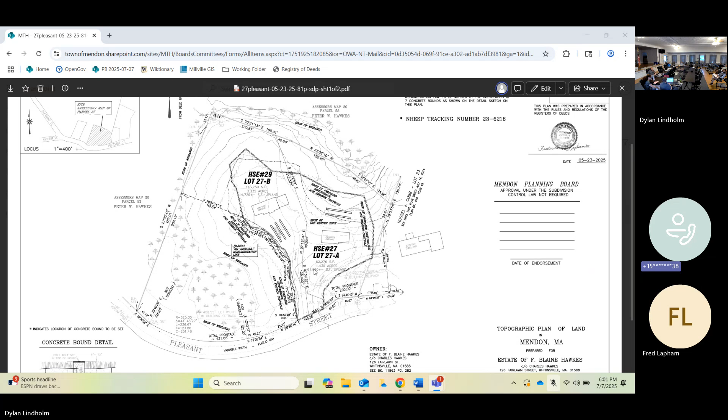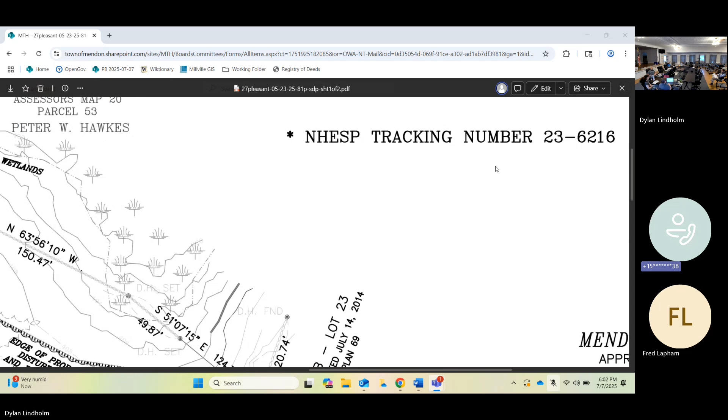Fred's online. Fred, if you want to explain the plan. Yes, certainly. This is a little different plan. The planning board has approved a plan showing 2 lots in this location on Pleasant Street. What we're looking at here is a compliance plan for the wildlife habitat permit we got for the site. They wanted us to put a plan on record, so we used the original ANR plan and overlaid our work area and the monumentation they're going to require. They're going to require 7 bounds, concrete bounds, to be set on the property. We're not subdividing land. I have a plan purpose note at the top of the plan on the right, and it is for the sole purpose of compliance with the habitat permit.

So we don't have to approve it, right? It's not approved under the subdivision control law, but in order to get it recorded, it has to be signed by the planning board. Otherwise I wouldn't be able to. So we need a vote to endorse the plan.

I'll make the motion to endorse the ANR for 27 and 29 Pleasant Street. Second. All those in favor? Aye, aye, aye. Unanimous. There's a copy here for us to sign, Fred?

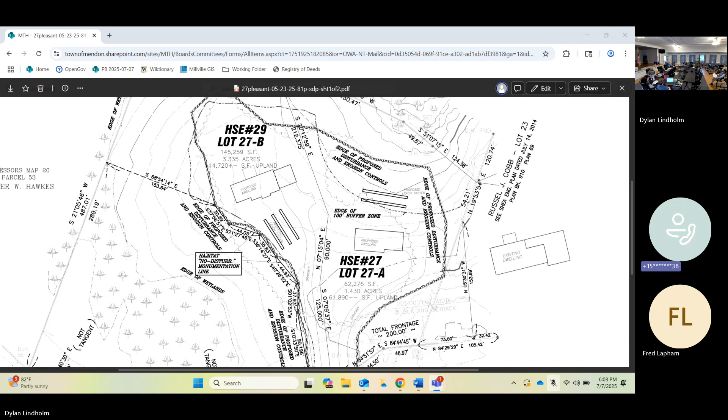Sign that. Wait, yes, I have copies up. There should be 4 prints. Got it. Why don't we sign them? We'll wait for them. They'll be in our office after today, so you can pick them up tomorrow or Wednesday. I can pick the original up tomorrow at the office. Is that okay?

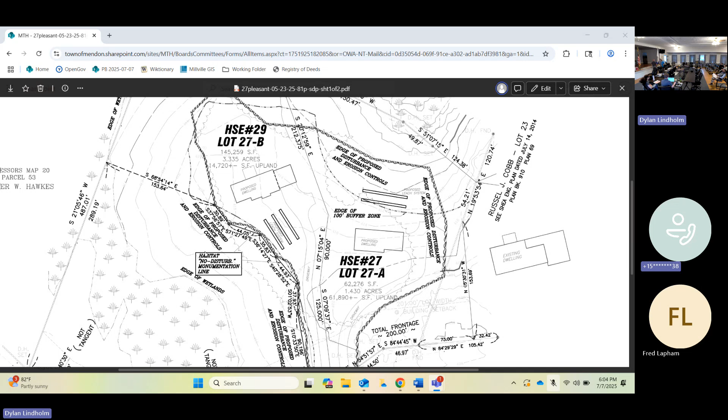Oh yeah. Yeah, this is... I think I'm having a reception problem here, but I'm assuming I'll be able to pick the plan up tomorrow. Yes, you can. Thank you. Sorry, I just can't understand you, but I'll come into the office tomorrow. Okay Fred, no problem, thank you. We don't have to sign the papers, just the money. Come on there.

So, 7 Nipmuc Drive. Yep, what do you got? Good evening, my name is Mark Santoro. I'm an engineer from Grafton, Mass. I'm here on behalf of the applicant.

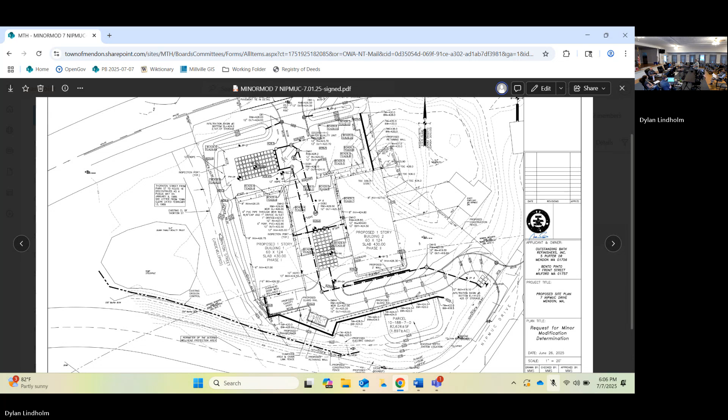This is a previously approved project and we're under construction. We're before you for a determination of minor modification, making 2 small changes. I always feel it's prudent to ask the board if you agree the change is minor, rather than go forward in construction and at the end have you say, wait a minute, you guys should have come back to us. Why don't you lay out the change and show us what it is.

The 2 changes I initially submitted together, but Jeff Walsh had some comments about the roadway, so I broke them out tonight. But if the board thinks both these changes are minor, you could still vote them as minor, and we could work out the details with Jeff. I'll outline the changes. Sorry, I didn't mean to skip your first question - I'm gonna explain what the 2 changes are first. I don't have his comments with me, but I remember them. The first one is very minor.

It's drainage materials. We want to change the material from plastic to concrete chambers, same elevation, same location. They both meet stormwater management. We submitted a whole new hydrology report to Graves. He reviewed it, had a couple minor comments, and I addressed them in this plan. The biggest comment was we didn't have a detail sheet yet. I didn't want to do the detail sheet until I saw he agreed with my concept that it worked, so I'm prepared to submit the revision to him after this hearing. If the board deems this a minor modification, then he can sign off on it. We won't proceed with anything until Graves is good with it. That's the drainage part. The other part was we had a conflict in the roadway location with a telephone pole.

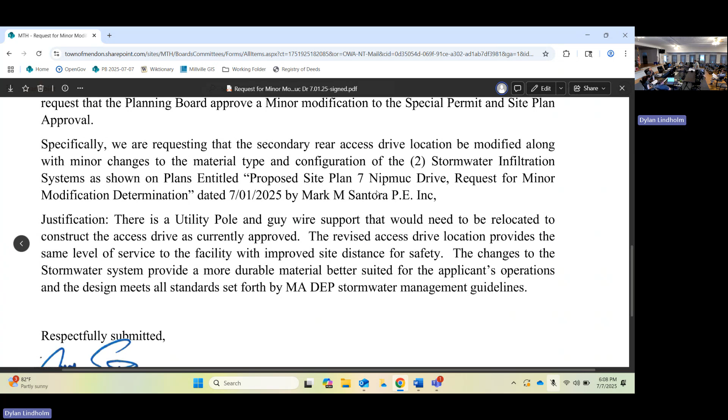We want to flip the road location from where it is. I could point it up on the board. Could you put the plan up?

The proposed road is approved right here, and we want to move it over to here. Yes, it's a better line, it's right where it is.

He commented he didn't have any problem with that horizontal alignment. His comment was about the vertical alignment.

I made two new plans, one at 10%, which is how it was previously approved, and then another one at 12%. I'd like to vet those two out, and if you could go to 12%, it would be a great benefit to the site, because at 10% it is a deep cut right here.

It's like a 2-to-1 slope, and then this wall, basically the road gets cut in unnecessarily. So are we looking at Route 16, or the back side? Sorry to jump in here a few minutes late, but if you have to cut it down that far, that means retaining walls if need be, and which in turn, if it's not done right, becomes a problem down the road too.

Yeah, and the way this new layout works, I have another version that needs the 7.5% Jeff wants to see there, and then it blends the 12% area and goes down to 2% here. At that point this wall becomes like a curve, and then a curve here, and everything in between is graded instead of walled.

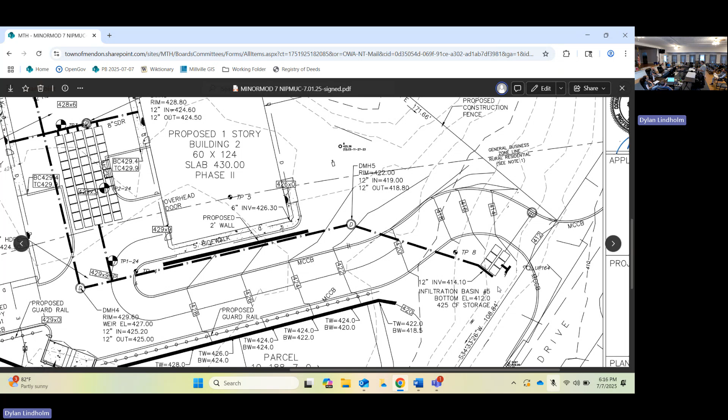I feel that the Cultec chambers, I personally don't feel like they're tried and true. I've seen failures with trucks over them, and especially with these new septic designs using all these plastic Cultec systems, a lot of them are failing. Yeah, it's weak.

You know, and it makes the- sorry. Yeah, no, you're right, no that's it. I mean, I agree with you on that. It makes the contractor look bad when the septic system fails after 10 years, when it's supposed to last a lot longer than that.

Is that for surface water or is that for septic? Stormwater. Stormwater, yeah. So we're proposing concrete chambers, H20 loading, heavy duty, on stone. Meets stormwater management, 100%. So it's like I said, if Jeff's comfortable with it.

Yeah, as long as Jeff, I mean, and then the grade on the driveway going in the back there. Maybe you guys talk it over, if you can stick with the 10% without having to go back and forth, make it work. I mean, if the 12% helps you and saves some money, then maybe, I don't know what you would do.

And respectfully, thank you for caring about the money, but it isn't even the money, they have to blast either way. Because it's rock right at the top, so whether they cut for 10% or 12%, what it's gonna save is the final condition at the end, instead of having the site raised and the roads getting cut.

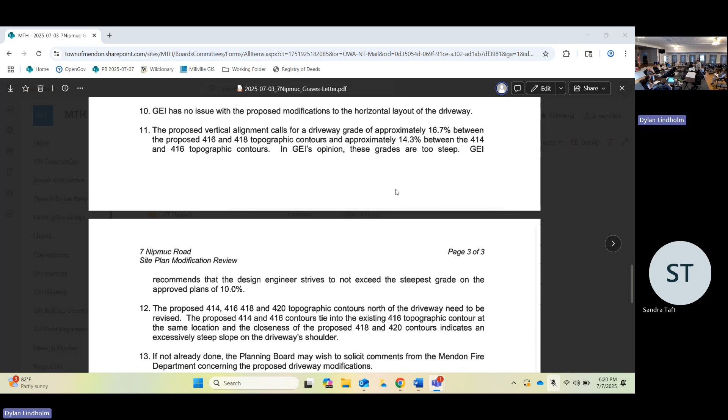I guess that is your answer then. Yeah, and to your point, it helps us tremendously to leave it at that, because as long as the horizontal alignment is okay, we go ahead, make a cut, do the blasting, and when it's time to fill, how high we go is based on this engineering. We can proceed, and everything will come together and we'll be doing the right thing. This is so that down the road nobody says this changed and it didn't go to the board. So we appreciate that. A lot of people would not do that, so that's a good thing.

The email we received from Sandra Taft was questioning whether Route 16 egress onto the highway was approved by the state. Yes, it was, and that's a good point, I'm glad you brought it up, because that's in his plan too, this changes in his plan. Valente, the owner, received an email from Mass DOT approval, emailed it to me, I read it and reviewed it.

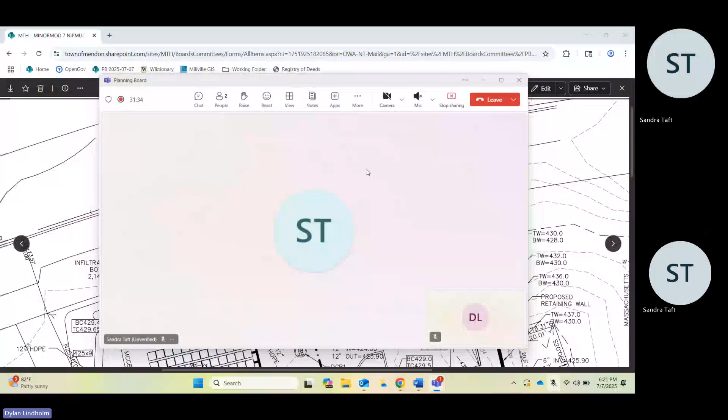Basically the approval was simple. Originally they were asking for as wide as possible, and they asked me how far we could go, so I said make it as wide as you want, see what they come back with. The state came back and said they want the road to be 30 feet wide with two 50-foot turning radiuses max. So that's what I laid out. I redrew the entrance at 30 feet wide, put the catch basins right at the tangent, and created two 50-foot radiuses. That's what the state permit was issued at, and now the plan reflects the state permit.

So there's an approval for the entrance off of Mass DOT. Okay, the plan reflects the new approval. The old plan was wide open. So this perfects that. By any chance can you please get a copy of that to Dylan? Absolutely, just so we have it for our records in case anybody questions it.

The second item was the amount of material being brought in, but you said you're raising the site, so that explains the material to me. Yes sir, clean sand from a local gravel pit. The gravel and rock was crushed from the site. There's too much aggregate, basically the material blend has so much rock, so sand is being brought in to augment it and make perfect gravel, and hopefully at the end it levels out. I'm tracking the quantities, did an earthworks analysis, needed 5,000 yards, brought in 2,500 or so, so getting close.

You're mixing it with the dirt already on site to make a spec grade gravel. Exactly, which is normal if need be. Be lucky you have it on site to mix with, because it would probably be 20,000 yards to export otherwise. So the rock, as much as it was a burden, is a double-edged sword. Once you make the commitment to blast and crush, it becomes product and it's not a waste. So we're recycling, which is a good thing.

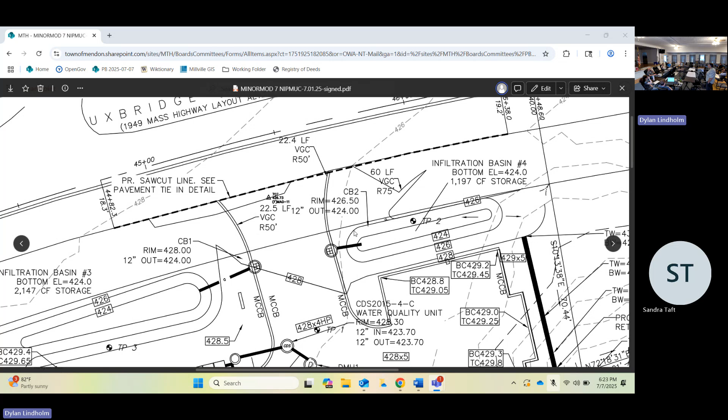Obviously we have neighbors who are upset listening to it, and I get it. Just have respect for them and do the best you can. I know you're moving as quickly as possible, you want to get your building up and moving, and I know the foundation's in. We tried to keep the hours of operation limited, the crushing operation is majority complete. The only crushing that might take place again is when this road cut is made, depending on quantities we may crush this and use it beneficially on site, but it won't compare to the original crushing, which was done quickly.

Can we go to Ms. Taft, see if she had any questions? Ms. Taft, do you have any questions or concerns? I heard something about blasting. How much blasting is going to be going on?

A couple of days ago we brought in the blaster, and we have pre-blast surveys done of all the properties in the area that are within 250 feet of the work. Those pre-blast surveys are privileged to the homeowners. We don't have copies of them, but a third party holds those.

We're going to try not to blast, we can use a hammer first. If the hammer can't break it, which we suspect it won't, then we'll get a blasting permit from the fire department. They'll impose conditions, maybe a fire detail, and it'll only be in the back of the site. Front of the site, we couldn't blast because of the state highway, so we fought through that with hammers and got to grade. So the majority of the cut has been done without blasting, and the back roadway is the last section, which will only be a couple of days of blasting max.

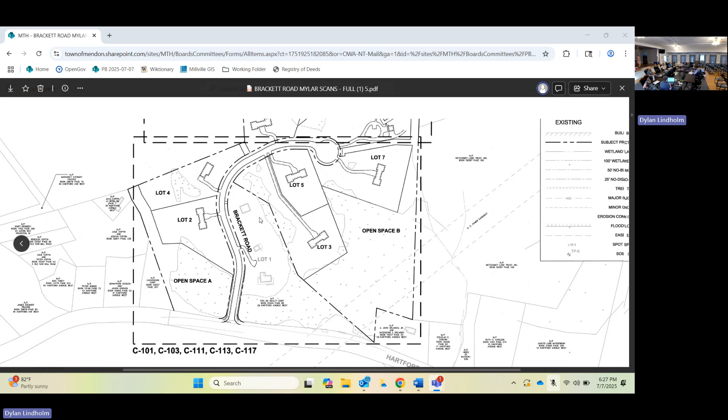No, so it's 29 West Hartford. Well, when it's all said and done, it will be renamed Brackett. No, it's off of Hartford Ave. So you know where, going Hartford Ave West, you start climbing the hill. Yep, there was an old rundown house years ago, well, somebody died in it. They had bought that, did a bunch of work in there. And there's a bunch of land out in the back that they had a subdivision for.

We approved it, it just needs the plans to be signed. So we just have to sign the plans, is that where we're at? Yeah, and no changes to the subdivision as we voted on. No changes at all, no. There was just a superseding order of conditions as a condition of approval that had to be issued and recorded, and that was done in October, about 8 months ago.

When did we vote to approve this? Oh, it had to be a couple of years ago. It was approved June 14th of '21, I never signed it back then, and it was signed, the decision was signed November of '21, November 8th. So how does that work?

Where we have two members here that were on here in '21, doesn't matter, right? We'll just sign them all, okay? You have them? We don't have to do it today. The engineered plans have to be signed individually to get recorded, 28 pages long. 28 pages? Well, alright, we could, whatever, what else do we have here?

Let's appoint a representative real quick, and then we'll jump on it. My term as CPC representative has expired, so it has to be renewed by a vote of the board. You want to do it? Yeah. Okay, what does that involve anyways?

It involves me going the first Tuesday of every month to another meeting about community preservation, on how we're gonna spend the CPC funds, who's gonna get what money. Planning board has to have a representative, Concom has to have a representative, selectmen have to have a representative, and there's a representative at large plus the chair.